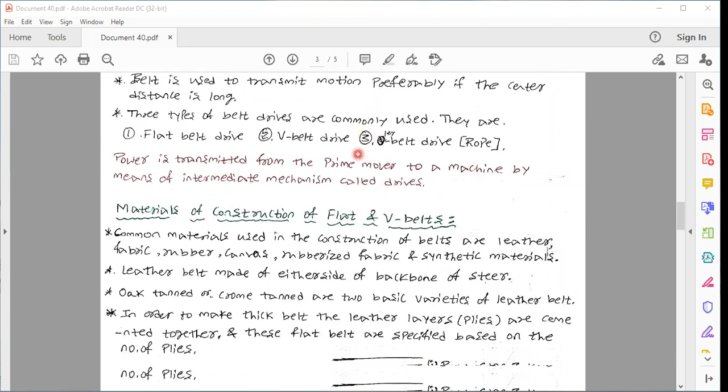When we use belts, if the center distance is more, we'll use belt drives. I will show you what is meant by center distance. Here you can see it is the distance between the two drives, the driver and the driven pulley. The center distance between these is called C.

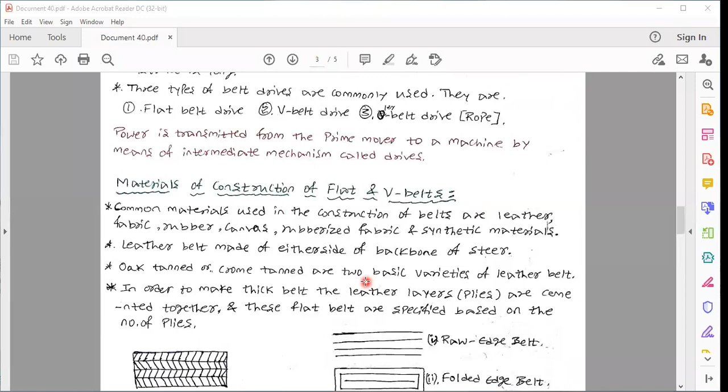If the center distance is greater, we go for belt drives. If the center distance is less, we go for gear drives. In the next chapters you will study gear drives. Now we'll see belt drives.

Belt drives are used to transmit motion, preferably if the center distance is long. If it is short, we use gear drives. There are three different types of belt drives: one is flat belt drive, V belt drive, and the third one is a circular belt drive, also called rope belt drive.

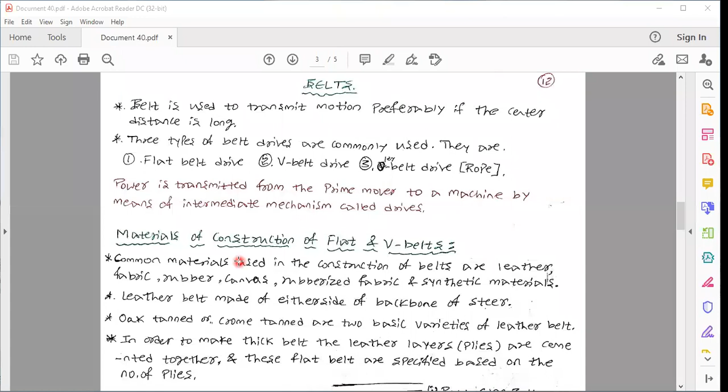By using different materials, these flat belt drives and V belt drives are going to be manufactured. We'll see the materials for the construction of flat belt as well as V belt drives.

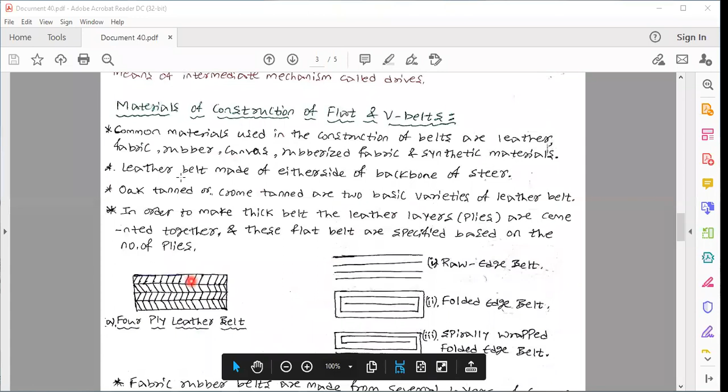Here you can see these are the belt drives. The common materials used for the construction of these belts are leather, rubber, fabric, canvas, or rubberized fabric, and synthetic materials are used to manufacture the different types of belts.

We'll see one by one. Whatever figure A you are seeing, it is a leather belt. In this, four plies or layers are there: one, two, three, four. Depending upon that, it is called a four ply leather belt. If two are used, then it will be a two ply leather belt. Depending on how many plies there are, we call that the number of ply leather belt.

These leather belts are made up of either side of the backbone of steer, and by using oak tanned or chrome tanned processes—these are the two basic varieties of the leather belt.

In order to make the thick belt, the leather layers are cemented together. Here you can see these are called leather layers or plies, which are cemented together. These flat belts are specified based on the number of plies. As I told you, if three plies are used, it will be called a three ply leather belt. Depending on how many plies you use, it will be called by that name. This is about the leather belt.

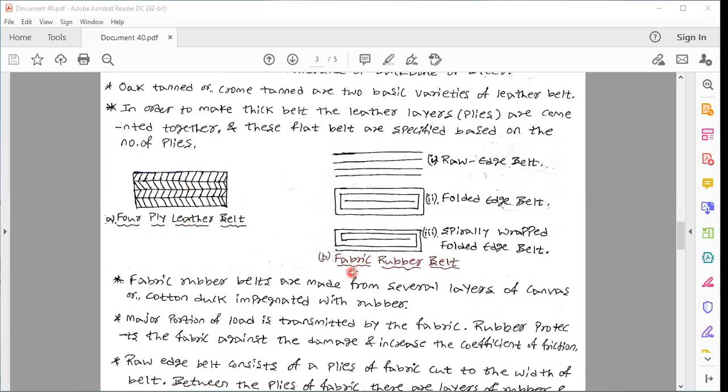Figure B which you are seeing is a fabric rubber belt. In that, three types are there: one is a raw edge belt, second is a folded edge belt, and third is a spirally wrapped folded edge belt. Whatever these fabric rubber belts are, they are made up from several layers.

These are made up from several layers of canvas or cotton duck impregnated with rubber. The rubber is impregnated with the cotton duck or canvas to manufacture this fabric rubber belt.

The major portion of the load will be transmitted by whatever fabric is there. These are going to transmit the major portion of the load, and the rubber is going to protect the fabric against damage or increase in the coefficient of friction.

We'll see what is meant by this raw edge belt. This raw edge belt consists of plies of fabric. These are the plies or layers of fabric which are cut to the width of the belt. Whatever the width of the belt is, according to that, the fabrics are cut and placed one above the other.

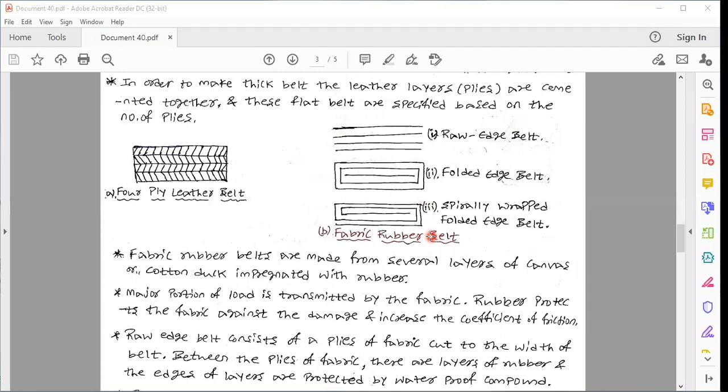This is about the fabric material, and these flat belts are produced in the form of long bands and stored in the form of coils. Usually these flat belts will be produced in the form of long bands, and to store them it is done in coils.

Once you join two ends, for example, this is a belt which I am going to join. It will be having two ends. To join this, different methods are there—total three methods are used. Assume that this is the flat belt. When you are going to use it in working, you need to join these ends. Here I have joined the ends. There are three methods which are used to join this, we will see one by one.

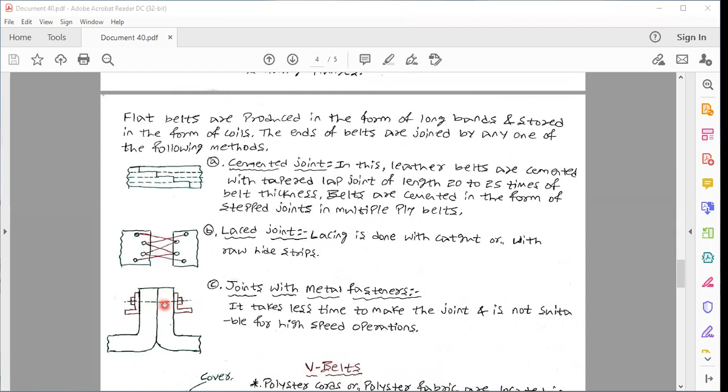The last one is joints with the metal fasteners. Here you can see that a metal fastener is done. This is the two belts which are going to be joined using the metal fasteners. Compared to both of these, it will take less time to join, but it is not suitable for high speed operations. For high speed operations, better to go with a cemented joint. And whatever the strength of the joint is there, it will be 20% of the belt's strength.

If it is rotating at a small speed, then you can go with a metal fastener joint. Otherwise, the best one is a cemented joint. Whatever flour mills you are seeing, I think you have seen belt drives there, they'll be using this cemented joint.

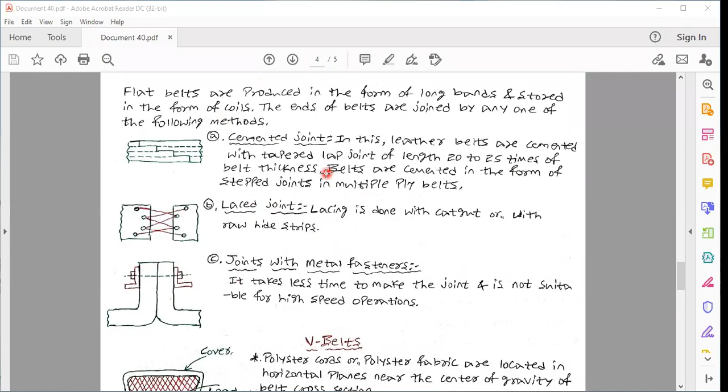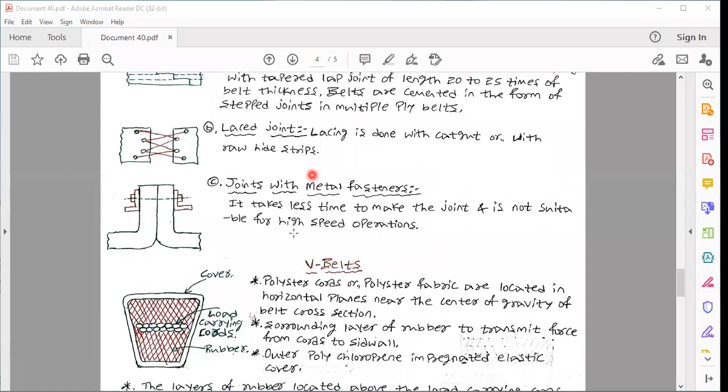These are the different types of belts we have seen, different types of materials, and how they are going to be joined. Next, we'll see one more, that is the V belt. This is the V belt. It consists of three parts.

One is the load carrying cords. Whatever circular shapes you are seeing, these are called cords, which are going to carry the load. This hatched part is rubber, and the last one is the cover which is going to cover the rubber and the cord.

Using polyester cord or polyester fabrics, the cords are going to be manufactured, and these are going to be placed or located in the horizontal plane, near the CG of the belt cross section. The surrounding layer of rubber is there to transmit the force from the cord to the side wall.

For that purpose, the rubber is used, and this outer cover is made of polychloroprene, which is impregnated with an elastic cover. These are the three parts or components which are used to manufacture the V belt.

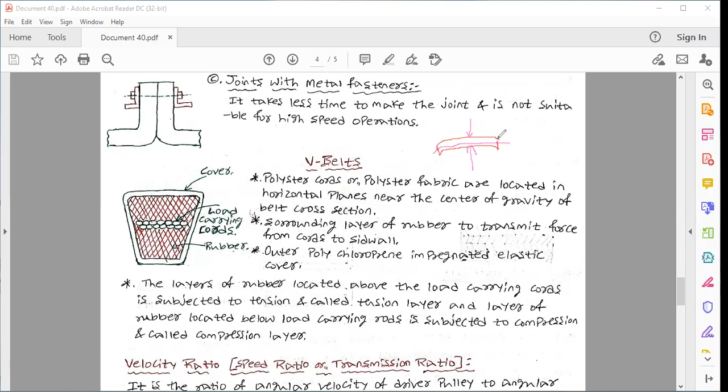The plies which are on top of this neutral axis are subjected to tensile; here you can see there's an increase in length, whereas the bottom ones are subjected to compression. Similarly, in the V belt, whatever layers of rubber are located above the cords are going to carry the load and are subjected to tensile or tension. That's why these layers are called the tension layer, whereas the bottom layers, below the load carrying cord, are subjected to compression. That's why it is called the compression layer. This one is the tensile layer, and this is the compression layer.

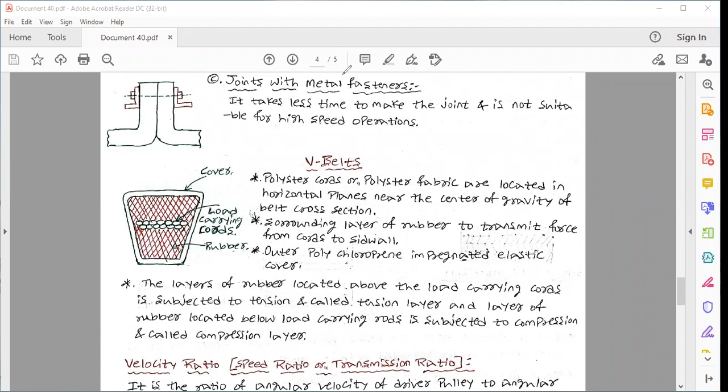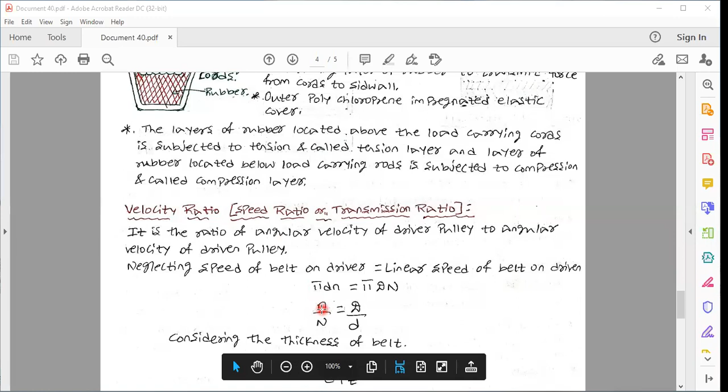Next is the velocity ratio. Velocity ratio is nothing but the ratio of angular velocity of a driver pulley to the angular velocity of the driven pulley. It is also called transmission ratio or speed ratio.

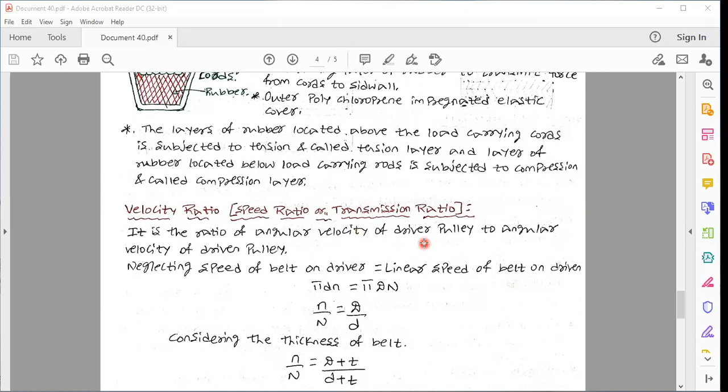This is the formula which will be used to calculate the velocity ratio. If the thickness of the belt is not considered, we'll use small n by capital N is equal to capital D by small d. Capital D is the diameter of the larger pulley, small d is the diameter of the smaller pulley. Small n is the RPM of the smaller pulley, and capital N is the RPM of the larger pulley.

If you are going to consider the thickness of the belt, you need to add t to the diameter, giving capital D plus t over small d plus t. This formula will be used to calculate the velocity ratio considering the thickness of the belt, whereas the earlier one is without considering the thickness of the belt.

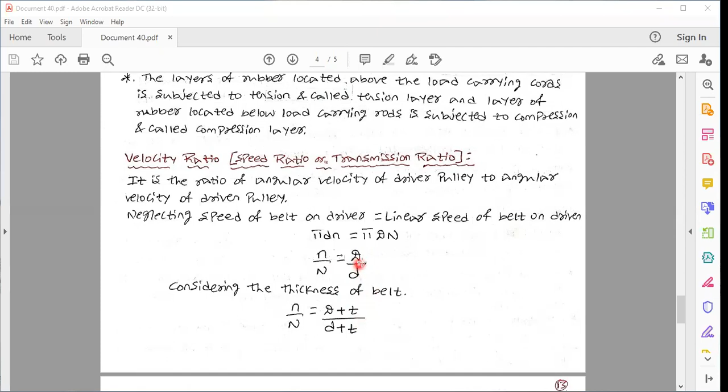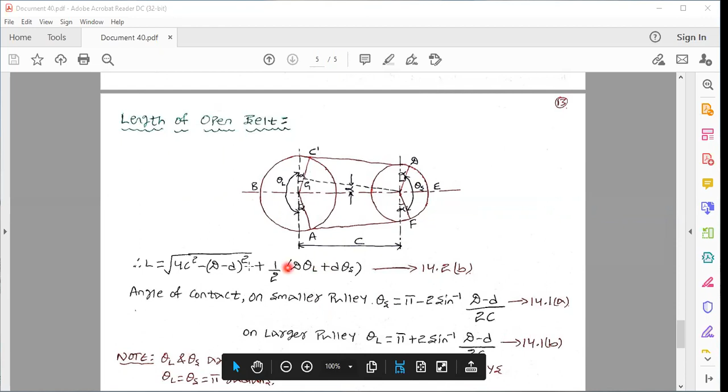This formula, equation 14.2b, will be used to calculate the length of the open belt. Whatever theta L and theta S are there, this is nothing but the angle of contact. Theta L is the angle of contact of the larger pulley, and theta S is the angle of contact of the smaller pulley. You need to calculate these angles of contact for both larger and smaller pulleys, then substitute them in equation 14.2b to get the length of the open belt drive.

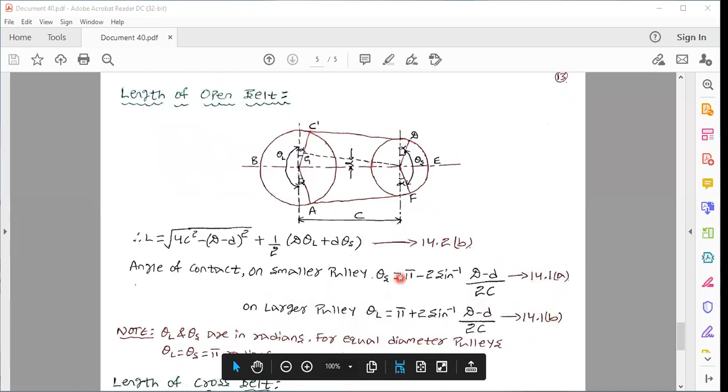To calculate the smaller pulley and larger pulley angle of contact, we'll use equations 14.1a and 14.1b. Keep in mind, the angle which you calculate from these equations will be in terms of radians.

Here you can see that the diameter of the pulley is different. In case the diameter of the pulley is same, meaning capital D is equal to small d, then the angle of contact of the larger pulley will be same as that of the smaller pulley. At that time we can take it as pi, in terms of radians. This formula will be used to calculate the length of the open belt.

Similarly, length of cross belt. This is how the cross belt will look like. Equation 14.2c will be used to calculate the length, using this formula to calculate the value.

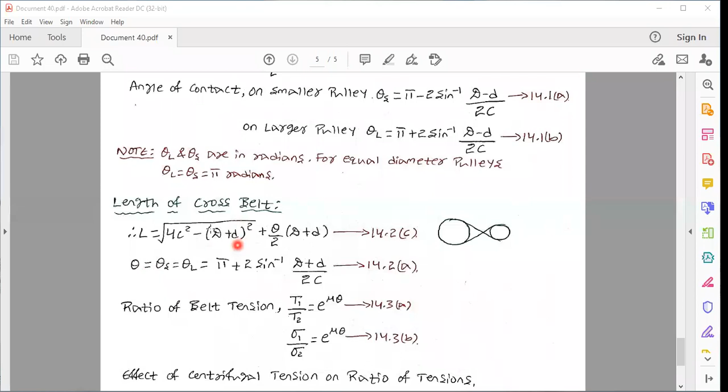In the length of cross belt, the angle of contact between the smaller pulley and larger pulley will be the same, so we'll call it theta. We'll take theta from equation 14.2a. Using this, the theta value will be calculated - the diameters will be given, center distance will be given. Substitute that to get the angle theta. Once you get the angle theta, substitute it in the above equation to get the total length of the cross belt. These formulas are used to calculate the length of cross belt and length of open belt.

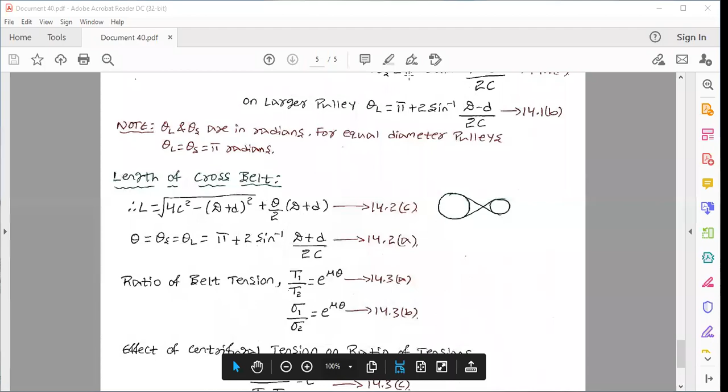After that, next is the ratio of belt tension, which is T1 by T2 equals e raised to mu theta. This derivation you have already done in your elements of mechanical engineering in the first year. This is how the ratio of belt tension will be used - equation 14.3a can calculate the ratio, and 14.3b can calculate the stresses.

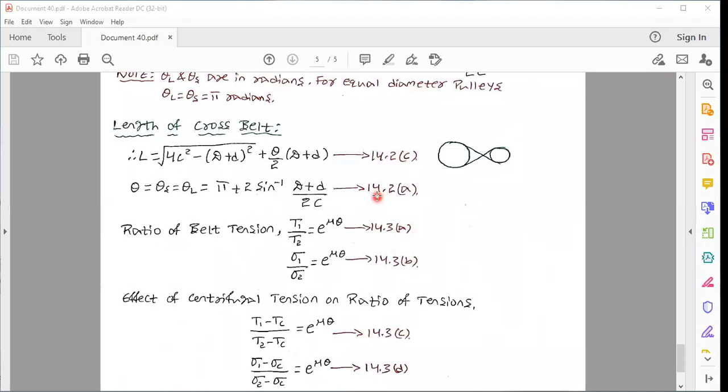After that, effect of centrifugal tension on ratio of tensions - how the centrifugal tension is going to affect the ratio of the tensions. These formulas are there in your data book, 14.3c and 14.3d. Use these equations to calculate the centrifugal tension.

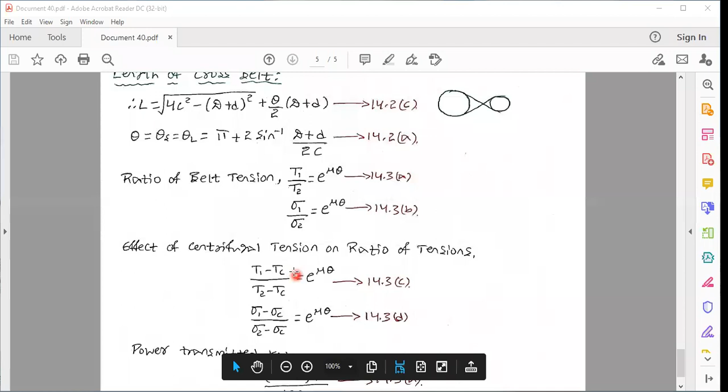One more formula is power transmitted. Power transmitted P is equal to T1 minus T2 times V. T1 is tension in the tight side, T2 is tension in the slack side, whereas V is the velocity of the belt. The unit of power is kilowatt, and the velocity should be in meters per second. These are the formulas which we'll use to solve the problem.